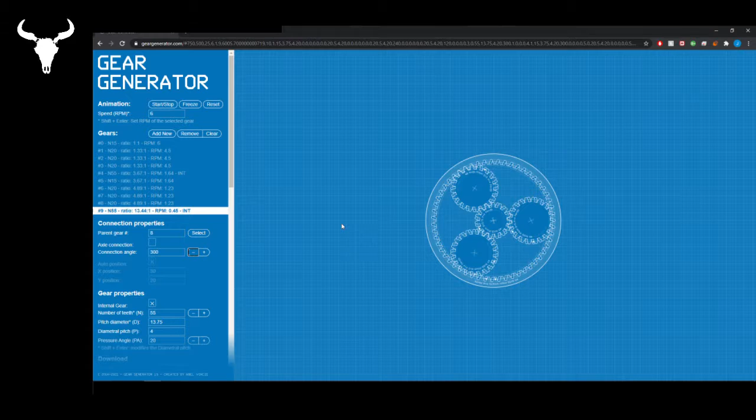That's about what I want on 2 layers. So let's say each layer can be about 10 millimeters thick. We have a 20 millimeter thick for a 14:1 ratio. Love it. Now we're gonna start from that gear, and we're gonna recreate it.

Can I split my screen? Right here, right here. Oh, that'll work, cool. Gotta move that away. Just give me a minute, just want to make sure.

Okay, gotta start from here. Extension, gear tool. I'm gonna post the link for that extension in the video. It's called Gear Tree. It's also on my page on Reddit. The link should be still there. I'm gonna start with involute gear.

First gear, 15 teeth. Now what I love to do, right here, calculator. What works good for 3D printed stuff? It is 40, but I'm working like, I don't know if you can see that thing here. I'm working at 100 times scaled up.

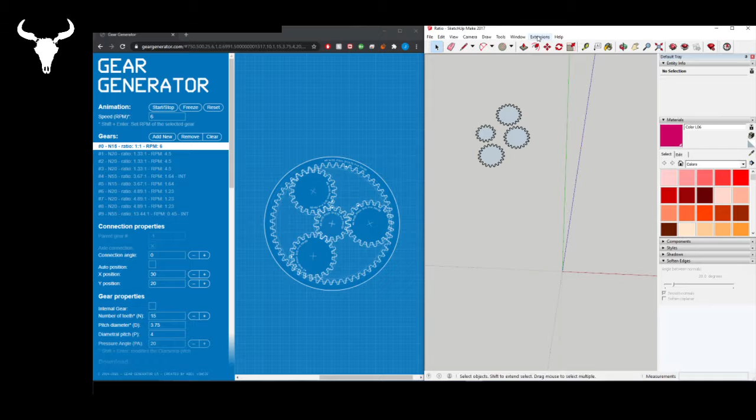Now we need the big one. Big one is 55. Gear tools, involute gear. 55. Calculator. 40. 2200. 2200 right here.

She will work. She don't look like it right now, but she will be functional. Okay, now that is the thing. You calculate this one, so you have

Okay, we had 15. Well, I'll do it in calculator. Shit, closed up my calculator. Calculator right here. So first we had 15 times 40, 600. Had that up to 800. The second gear, we have 1400. Do a circle, 1400. Divide by 2, because it's half of it. Like, whatever. It's how it works. Half of it. So 1400 divided by 2, 700. Maybe not. Don't divide by 2. My bad.

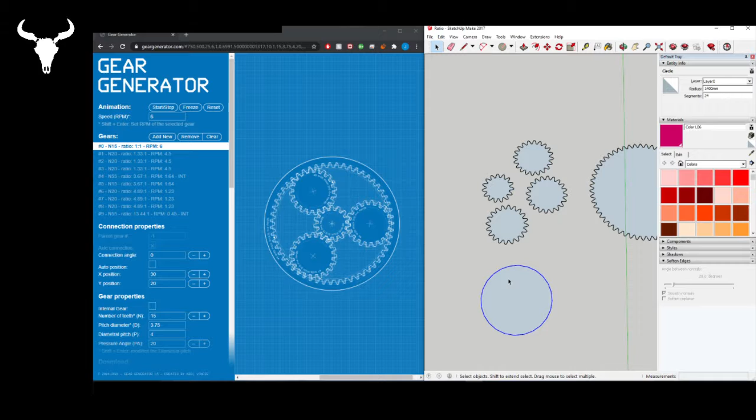Circle back 1400. Okay, we're just gonna make it round. No, not right now. Bad idea. Don't segment. Leave them like that. Actually, even better. Can I do that? 3. Huh. Awesome. It works even better. We're gonna move that. No, we're gonna move that here. We don't have a center.

Just give me a second. Okay, sorry about that. Good, so we go back to it. You gotta find the center of that triangle.

Yeah, looks great. I'm gonna move the stepper gear right in the middle. Yeah, looks about right. Let's move that gear right here. That gear right here. That gear right here. Looks pretty good. Yes. We can close that right now. We won't need it anymore. There you go. So that looked pretty good. They are all at the perfect location.

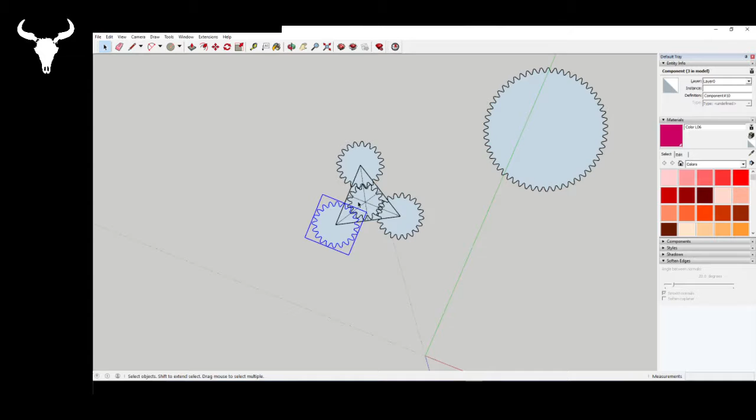Now we're gonna take that gear, move it in the middle, right here. Now the teeth match, but they match the wrong side. So you're gonna make component. Almost forgot about that. Hit that component. Start from the right middle. So we see right here.

If you can see. Right here, I'm gonna have the complete size. Gonna see if you see my mouse. So in here, I have 2300. So we're talking 23 millimeter. I want to add 3 millimeter of side wall to it. So we're gonna go 2600.

And I want it round. I don't want it like all rough like that. So we can click on the outside. Segment 96, usually do for 3D printing. You don't really need to do higher than that. And I'm gonna select the middle, remove it. Ta-da!

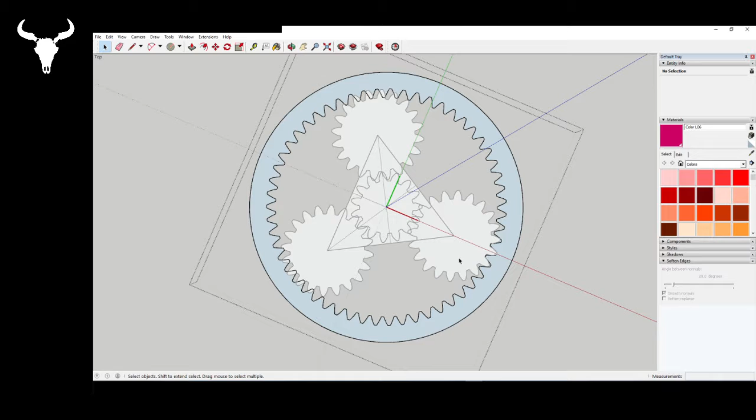Awesome. So I will remove my little, I need to get out there. I'm gonna remove my little triangle. Nope, nope, that one. That one we need. Triangle, triangle, triangle, triangle, triangle.

Okay. Another super tool, it is called Solid Inspector. You can just like look for it. You're gonna find it right away. We're gonna fix stray edge. You're gonna see me doing that like 1,000 times. I just do it every 5 minutes or so.

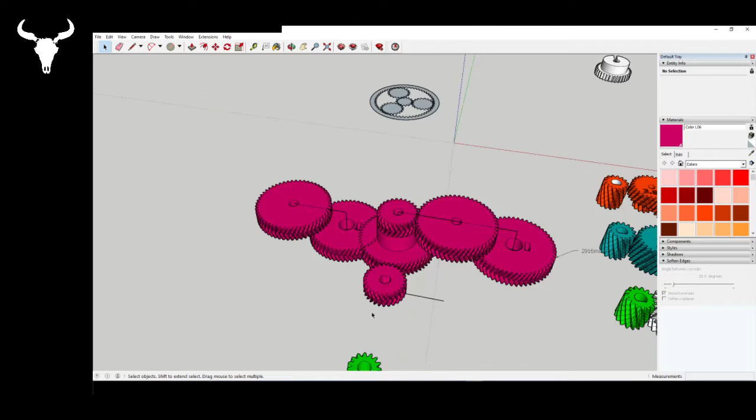That looks like a planetary gear. Awesome. So now we're gonna go from that to well, something like that. They look pretty good. I think those are the last one I printed actually. Yeah, let's go with that.

So it is one gear at a time. So let's select that one. We're gonna lift it. I want 10 millimeter height. 10 mil? Yeah, 10 mil should be good enough.

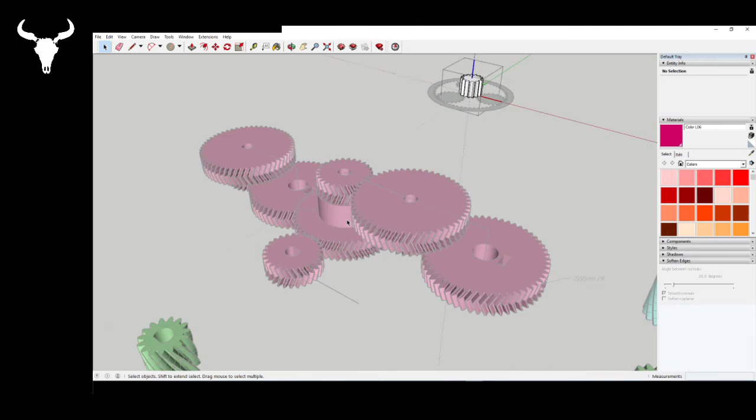The thing is if I go again, do it just to show, so I go 10 mil, that is not good for the 3D printing. I don't like those. It does not work great. It's shaking. I don't like those. I prefer those one with an angle, or even just like single like that.

But now I'm gonna show you why. As you can see, there is 1, 2, 3, 4, 5, 6 layers on that one, and it is almost straight. Looks pretty good.

On this one, if I do it just for fun, so we take top, rotate, corner, we take corner right here, and I go whatever I would need, about 20 degrees. So it looked good, but if you see on the side, yeah, you can see here, it is not straight.

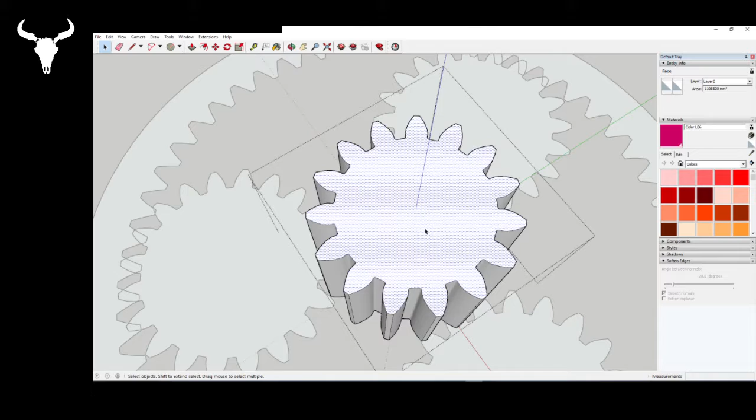It have a curve. It dig in the middle. It's how it is. So now we go back. We're gonna lower that and we're gonna do section. So I'm gonna do 3 sections of 250, so 2.5 mil.

And I'm gonna rotate each section, sorry my French, by 5 degrees. So if you look in the corner, I use my keyboard a lot, so you have to keep an eye on the bottom right corner, like right here.

That does not seem right, is it? Yeah, it is. It's fine. Okay, 5 degree angle. We go up by another 250. Same thing here. Select, rotate right here. 5 degree. Yeah, we're good.

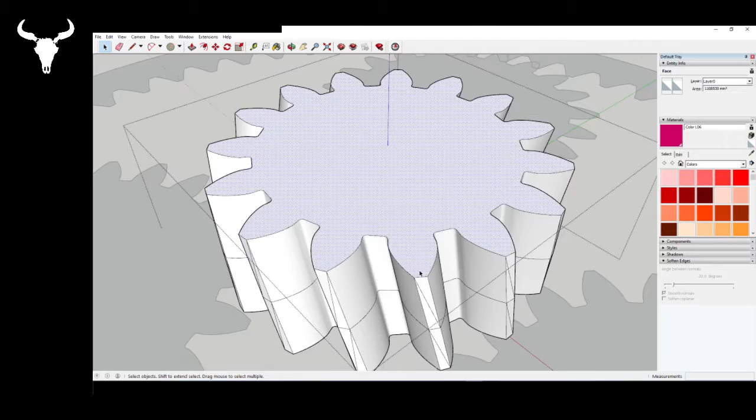Now we're gonna do herringbone. Herringbone. Well, that little shape. There's a name for it somewhere. Herringbone something. Right here. So that little V shape.

So super easy. Go here, lift right here. Lift 250. Select. Turn. 5 degree, other direction. Yeah, you see where I'm going? Can't be easier than that.

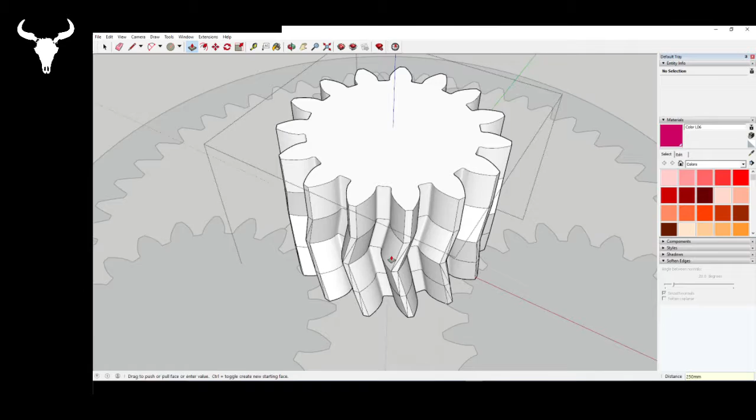I love that shape because it kind of keeps gears aligned together, so they don't move up and down, or so you don't have to bother much about up and down clearance. You don't have to care about it. It worked great. It also eliminates most of the vibration because, well, because it is not perfect.

Sometimes those corners gonna hit before, then gonna transfer to those corners, because the shape, it is not perfect, and you will see the angle isn't perfect either. I would love to find the perfect math to find the angles, but really it worked for me, so I really don't care that much.

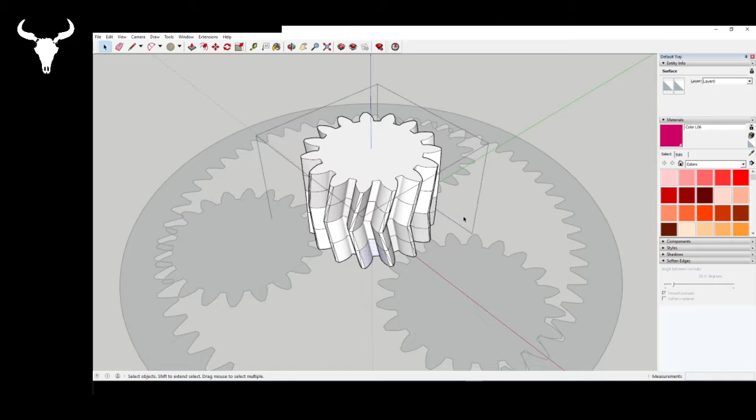I do my angles approximate, they work great, and they actually cancel the vibration. And also the feedback. When it turns on one direction, then it turns on the other direction. It's like on actual gears. If you buy those gears, you're gonna have a little slack, and it's gonna steal like 1,000th of a millimeter or something. I don't have that.

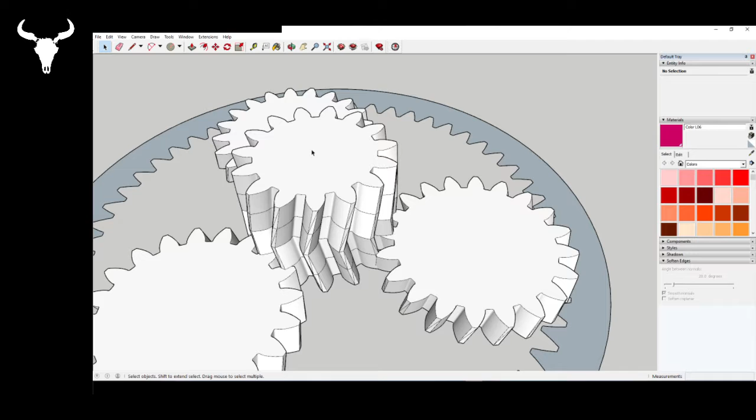This is, I would love someone to explain it to me why it does not work, because it should be working. Like, you take that platform, you start from 0, you do 5 degrees. Take this one, 5 degrees should be the same. Like 360 degrees would be coming back to the same teeth. I don't know why it does not work.

So we're gonna erase that. There's one way to do it. Took me a while to figure it. So I'm gonna go here. I'm gonna go to the gear I did first.

Corner of the first section, or whatever section you want. I'm gonna go down. On your keyboard, if you're not used to SketchUp, you have those arrow keys. Use the arrow key, so it's gonna keep you going in a straight line. It is awesome. So right here, I'm gonna say it is awesome like 1,000 times, because I'm not drinking coffee and I'm French, so yeah, deal with it.

Now I go right here, corner right here. You see in the corner here, it tells me I'm at 250 millimeters. That's correct. So I click once, and I don't click, I just push it right here. Don't click, so leave your pen right here. Right here, I have 59, and if you can't do it, right?

No, I can do it. When I do my 59, there's a little line average. This is why I use my keyboard. So we have 59. You will see why in a second. So I click on this one.

Plate, rotate. I select the gear. Wait, my bad, skip the step. Okay, so I'm gonna go here.

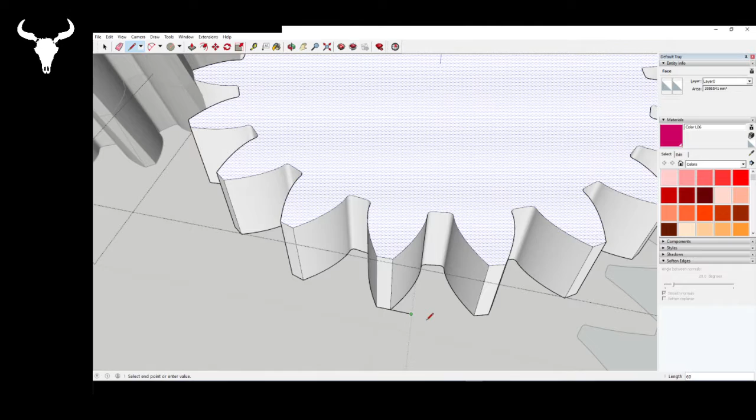This is the imperfection that's gonna make it perfect. So I'm gonna go up to 60, and now I have a little guide right here.

I'm gonna take that corner right here, well, the opposite corner of that line, and I'm gonna bring it. I'm gonna click, you can put your cursor right on top of it. It's gonna be the closest point to that point.

We have a 3.9 degree angle. So you see, it is not 5. I have no clue why, but I don't care, because it works. I'm not a mathematician, I'm not an engineer, I just do this for fun. 3.9 worked for me. The thing is, you see the little line?

Like, I'm looking right here right now. So just look right here, where my little mouse is moving. So I'm at 3.9, you see the little average line, closer to 3.9 or whatever. You don't want to use your mouse for that, because you won't be able to see the rest of the number. It can be like 3.94, 3.96, you don't see it, you don't know it. You don't want to click with your mouse.

You want to click on your numpad and let's do 4. Enter. Boom, there we go. So now we know that our angle for this one is 4 degrees.

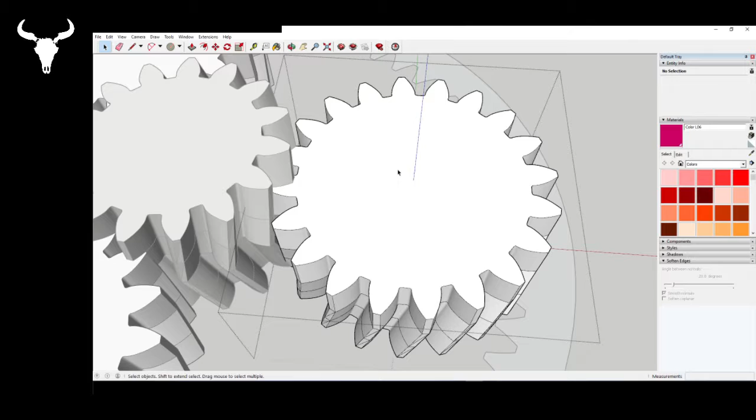250, and we're gonna go with 4 degrees again. Right here, 4 degrees. Then we're gonna go the opposite side, 250. 4 degrees. And last one, 250.

4 degree. And because you always lift from the top of the last layer, it's always the same degrees, because it just adds up. You're already adding up, so it's always the same angle.

So that looked pretty good. Oh yeah, and they're all aligned. That is awesome, so you see, boom. So we have 3 gears, functional gears.

So we're gonna do that. Oh, here. Export STL, you might not have that option. It is an extension called STL, I don't know, it is an STL extension for SketchUp. It's free, it worked a million dollars. It is awesome.

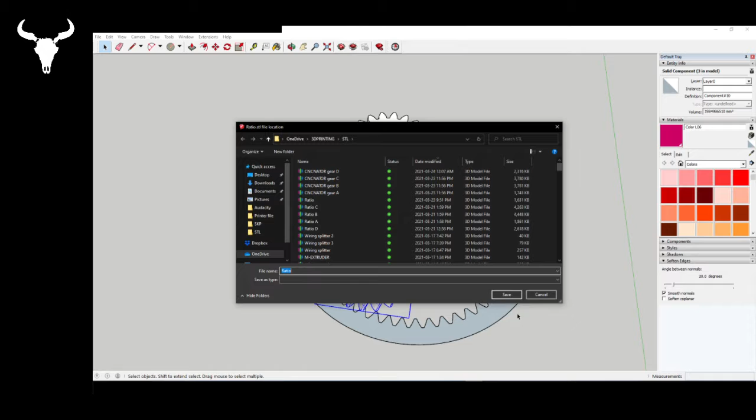Okay, we got save as ratio, it's good for that. Ow, that was loud in my hair. Wow, I should really reduce. Oh, that, ow, that was so loud.

If I go from one point to the other, look in the corner, bottom right corner, it is like a meter, 1.4 meter. It is reduced by 100. So that way I can work on it here. It's much easier to work, to see the error, do much better, a much better definition. You can fix smaller stuff and everything.

SketchUp is not... SketchUp is a starter one. Like I use it because I'm good with it. If you're learning a CAD program, learn something else, please. This is really just amateur, whatever. It is great stuff, but just like my kid plays with it. It is awesome. Okay, so back to it.

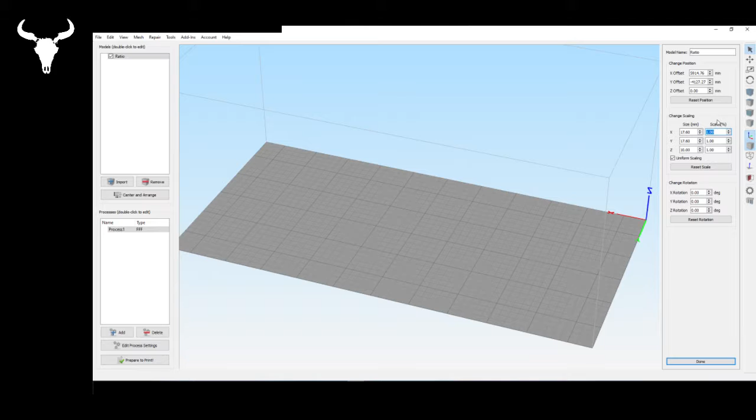So I said times 100, so I go here, double click on that scale right here. Take a second, 1, done. Center and Arrange, there you go. I have my gear right size.

So I use 100 just for that reason, and every time I load a part in there, like any part I did, those I can show. There you go, it's always telling me that. There you go.

1% center, you see? It'll work. Awesome. It's just a way to do things, it's how I work with SketchUp.

Now, so I have my gear. She looks pretty. Is she printable? Prepare to print with your regular settings. She is.

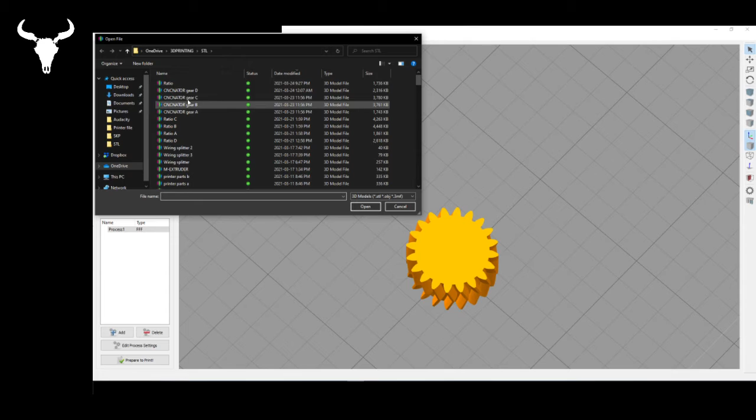She's not bad because you can see fillers in here. It is the minimum. Let's go back a bit. Are those the same? Yeah, I know. I just want to make sure I haven't screwed something up.

Center, come on. There we go. Print. That is interesting.

I look like I have more than... Why do I look like I have more gear?

Wait a second, export STL. Ratio, that one, 927. Yeah, it's good.

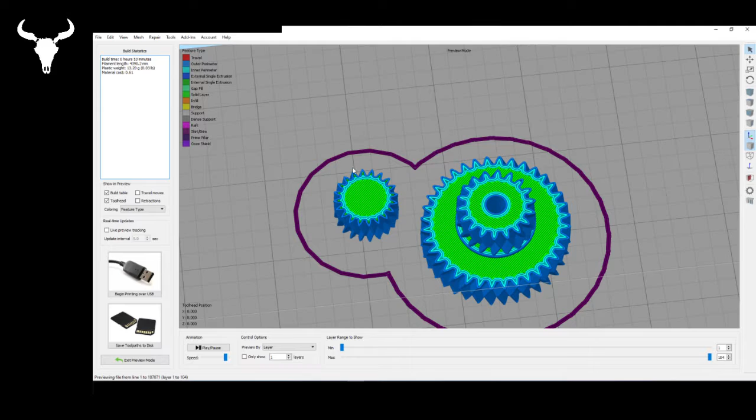Why do I look like I have more? 2, 3, 4, 5, 6, 7, 8, 9, 10. I have the 20 teeth on that thing. What is wrong with that?

Let's remove everything. Ratio, 9:30. Yeah, I know.

Huh, that looked much better. Okay, no, sorry for that little thing. I don't know what happened with that. Prepare to print, no, it is the same.

1, 2, 3, 4, 5, 6, 7, 8, 9, 10, 11, 12, 13, 14, 15.

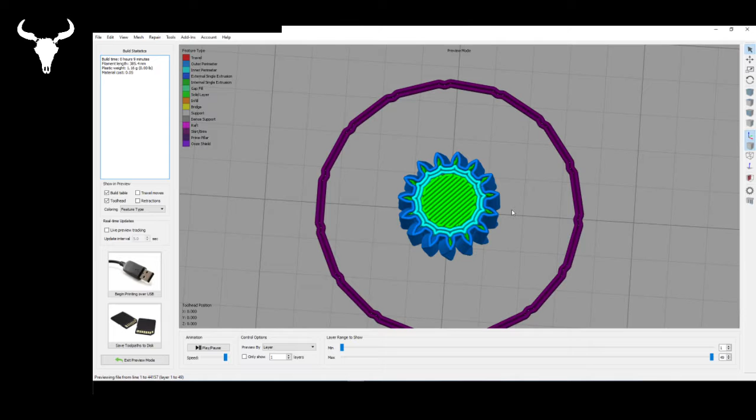Let's go with that, it's small. I love to do about 20 teeth, but it is small. It's really limit, this one's really limit, where you see some places where you don't have fillers.

See it, but I'm using my setup right now. This is a rough machine, it's 0.4. Yeah, I guess it's gonna do for everyone.

It is the minimum, you want at least filler in there. If you don't have fillers, make the teeth bigger. You want at least filler. If you can have 2 layers outside, it's even better.

At least I know that one print because I do it all the time, and she worked great. Those are actually gears running my printer, so I know they work. So right here.

So we know the print now. We have this one here, we have to do 2. That is going to be a first, that is going to be interesting. So from that thing, you're going to hide the rest because I don't want to see.

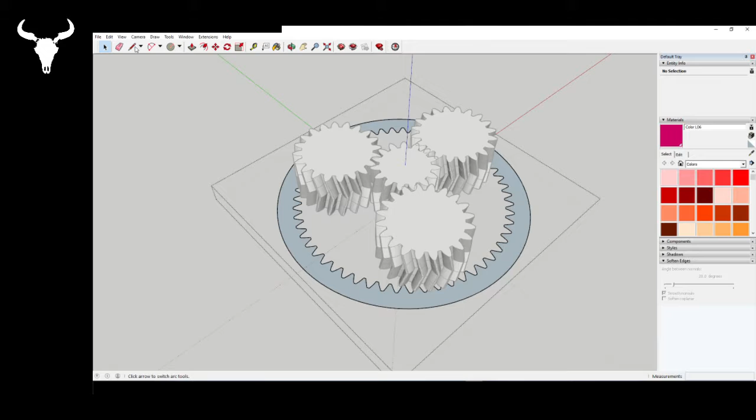Shit, I forgot how much I had. Oh wait, I have to do my measurement again. So I go here, down to that one, 250, and 59. So 60, okay, we were at 60.

This is gonna be a first. Sorry about that, hide rest of model. I don't want to see the rest of it. We gotta lift that, 250.

Now we want to rotate from the middle. That is gonna be interesting. No, actually, you know what I'm gonna do? I'm gonna start the line.

Since you can get the origin right here with that tool, with that gear tool, it is actually always a perfect middle of the gear. So we'll start from origin, top key, we want to do 10 mil, right? So 1000 right here. Now we have a line, so we click on that thing, rotate from here.

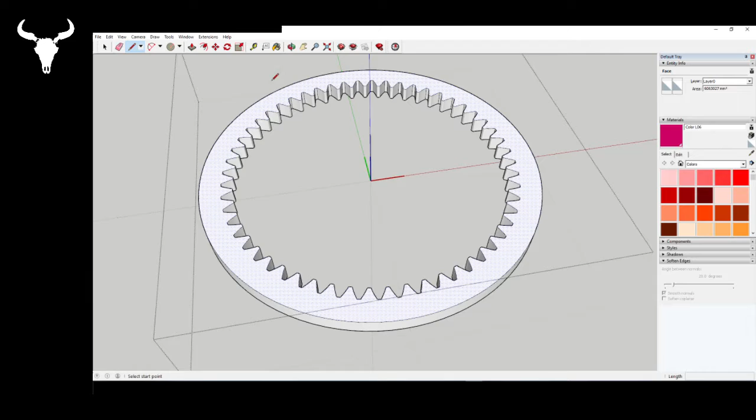We need to do those. We're gonna start from here, corner, 60, and right here. So we're gonna rotate from...

Gonna go with, if you want to see, they're all rounded up. It's right here, it's smooth. If you want to see those, view, hidden geometry. There you go, awesome. So I want that line right here.

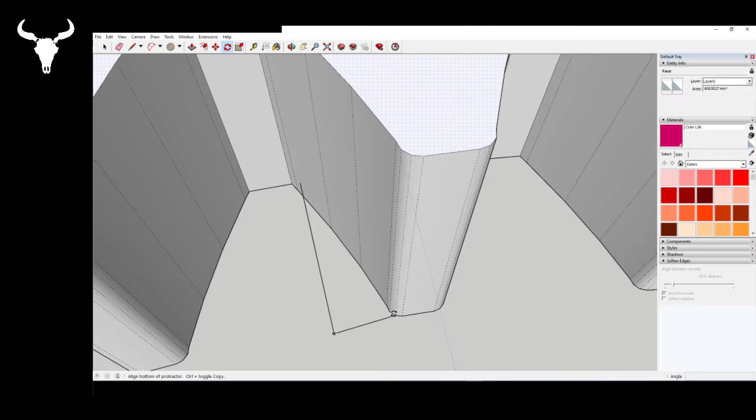Here, I'm gonna rotate it here. 1.6. Yeah, I guess let's do 1.6. But again, right, it won't click. If you click, it won't work because it won't be the same in between each layers. So you don't click, you do it 1.6. Enter. Boom, there we go.

Okay, let's take a quick look. Am I in the right direction here? I'm not sure. This is going to be a first, so that's going to be, well, you see...

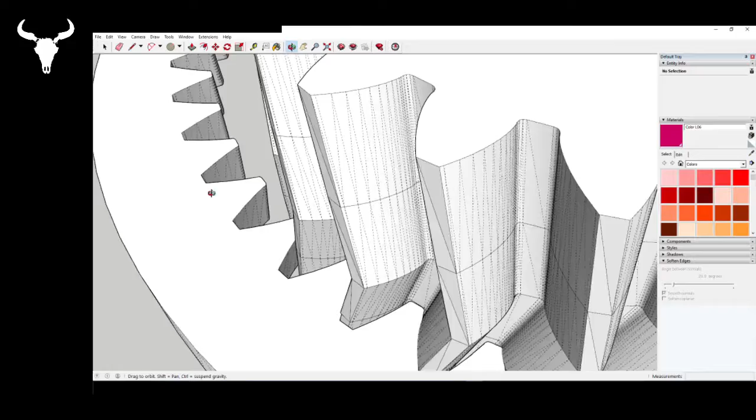View, face style, X-ray. You see that gear here, she's in contact right here. She's not in contact here. And we turned that way, so let's do 1.5.

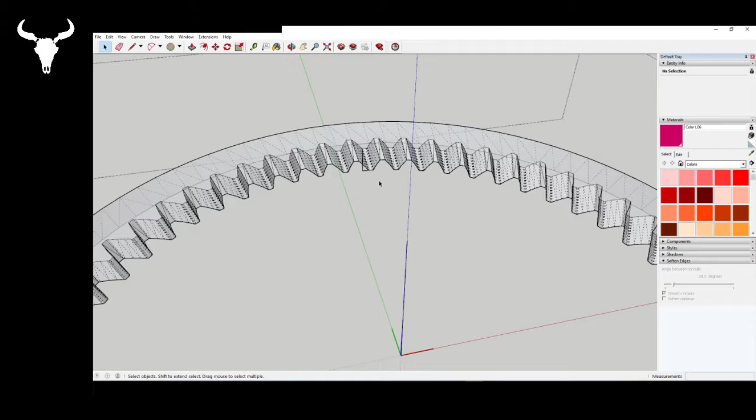Where am I now? Oh, right here. Let's do 1.5. I wish I had a perfect number or something, but I don't have any. I try until it works - that's basically how I learned to do it.

Whoops, I have to click on that section first. If not, you're just going to rotate the center. You can click on any point, really, it doesn't matter. 1.5 - no, not 6, 5.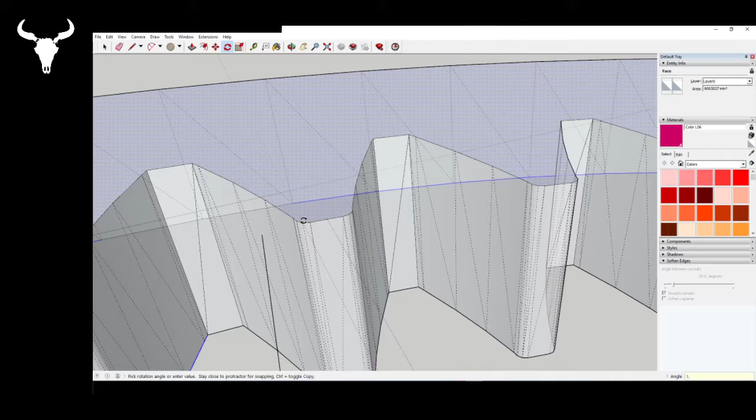We look almost farther, let's look at that. Come on, there we go. I hate that thing - no, not that one. Not that one. Huh, looking better though, right here. That looked pretty good.

So you can see, if I take that line here, I'm in contact right here, and I am in contact right here. So you see, you can adjust. It's why when you see the 1.6 with that little line, it is not fixed.

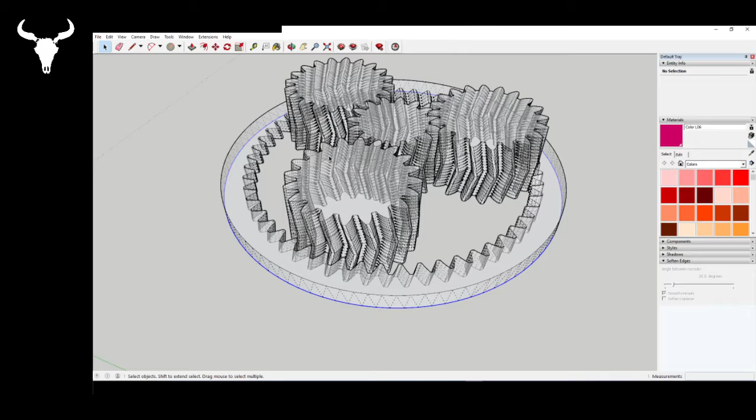Do it with your keyboard. You can add and remove, just usually I go up. It'll always work. But you see, with the size of that gear for X region, I removed 1.5 instead of 1.6, whatever, and it does look pretty good.

Oh yeah, cool. Now we're going to put her face back to - there we go. Everything's white. Everything's so white, I hate white.

Let's do - that looked better, oh yeah, that looked much better. We'll change those right here, a little bit lighter, and this one darker. Awesome, looks much better.

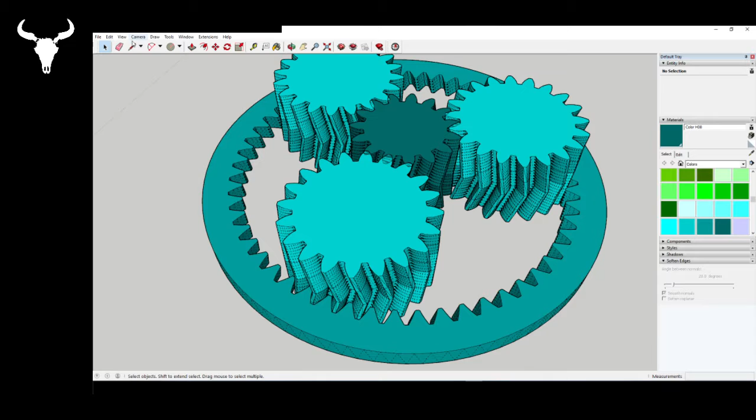Okay sorry, also I don't want to see those lines. You might need those, I don't like those. There you go. Okay, so first layer will work. We have 1.5, so we can do this.

Same thing again, lift. Oops, 250. No, it's always the same, it's a bit more complicated. So here we have 250. We want to go up by 250, so you can see bottom right again using my keyboard. 250, enter.

From there, if your tool, when you rotate, is not the right color - right now we're working on a blue line, we want to be working on a blue line. If you hit your arrow key on the keyboard, you have green, pink. Pink is related, you can see there's another pink line. It's just going to take the closest line and go the same direction. Red is X, I guess. So green is Y, and blue is Z. Those are the arrows on your keyboard - use those, they changed my life.

And you see, I just made a mistake. You have to click right here first. Why is everything selected right here? I just want to turn that, I don't want to turn anything else.

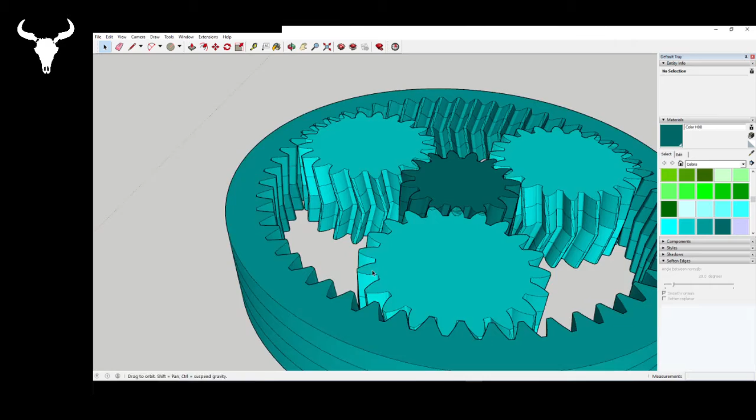That looked pretty good. And you see, after all those levels - oh yeah, looks pretty good. So that would be it - well, now you just take your gears, put the shaft in the middle, and you have your planetary gear. That is sweet.

That was easy. Now for this extra part, I should have something so I can cut the videos, but whatever, I'll figure it out later through like 3 videos or something. That is the extra part I want to do now.

Because when we went here, you see I had 2 gears on top of each other, because I want to achieve 14:1 - that is a great number, love it. So we're going to start the second layer. Most of it's going to be copy and paste because they're already built - we're all using the same gear ratio.

The thing is, we have to connect the outside layer, the outside ring, with the middle gear. Let's do that.

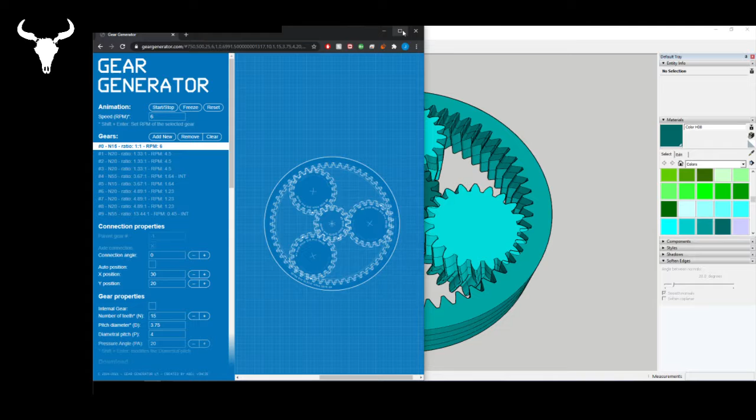I'm gonna take that one here. Actually, you know what? I'm gonna take all of that, copy, paste. I'm gonna keep that. Come on. Oh, there you go. And make unique right here, so you don't modify it anymore. Just for later, I'm probably gonna need it. This one here.

I'm gonna give about 0.5 mil, so we're gonna go with 0.5, so 50. Okay, we're gonna fill up the top section. Now we have 0.5 of space, just so it's not right by the top of it. That is not the center, we don't want to get messed up.

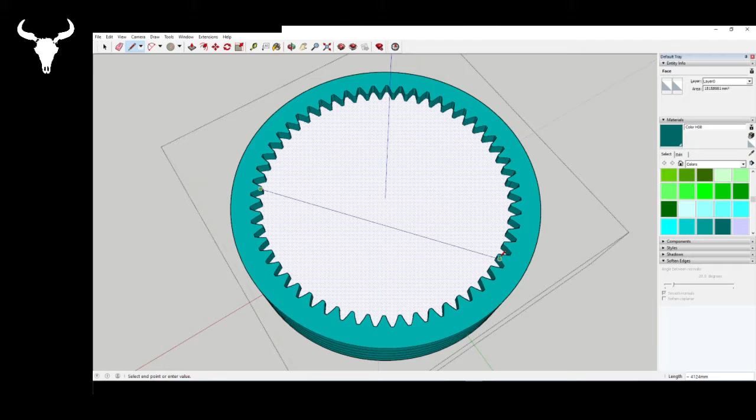Okay, now we're gonna give him, it's about 2 mil. I love some thickness in what I do. Okay, we won't, don't lift this one. If you lift it, it won't work. Well, it might work, it might not. Just do another line right here.

Okay, now we're gonna click here just to make sure that you don't actually lose those steps. Intersect face with context. There we go, that was good. Also reverse that face, she's upside down. Right here, we're gonna select that here, delete it, and we have a top.

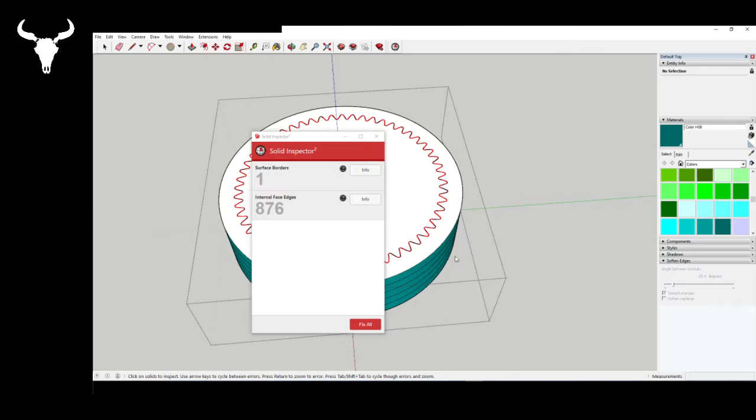Now you can see those lines here. We can delete them right here. Solid inspector, we have surface borders, internal edges. Can I do that? Select internal edges, close that. Not sure. No, we can't do that. Okay, don't do that. Okay, come on. There you go. Okay, so we're gonna delete that one.

Does it really matter? You know what? I don't think it actually matters. But if you delete that one here, oh nice, now you see your gear. And I delete all of those here. That's gonna take a while. Does it work? Oh yeah, look good. Okay.

Come on, a little bit of lag. I'm using an old version of SketchUp too, so if you're using anything newer than like 2017, you might not lag as much as I do. It worked great for me, and I'm broke, so I don't want to pay for like 2021 or whatever.

So clear that out. Fix edges. Those here should be fixed after. So let's just close that circle right here. Come on, next point. There we go. That looked good. Should be able to fix. It doesn't want to. Select internal face edges.

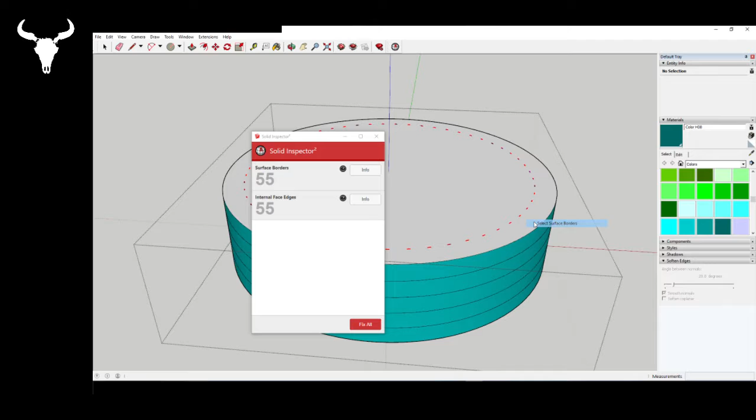Delete. No, don't do that. There's one of them. Surface border. Surface border. That looked good. There you go. It worked. Awesome. Just to make sure, is this one right? Yeah. Okay, there you go. Look awesome.

Okay, now we're gonna take our shaft gear. We're gonna copy it, paste it right here. No, actually delete. Double click on that.

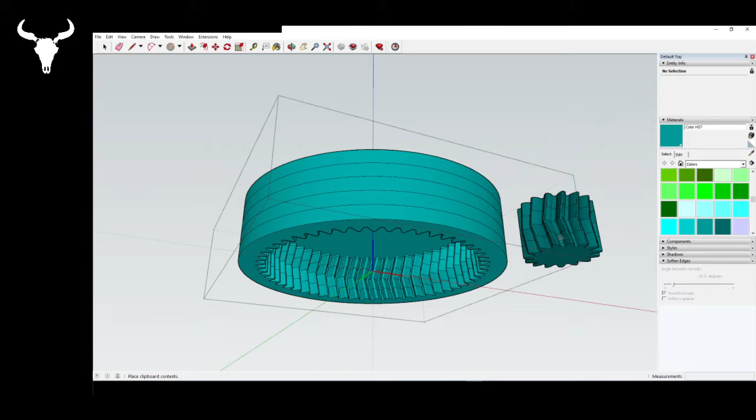So now we're editing this one now because we're gonna add it to that component right here. And here we have origin, and we're gonna put the origin right here. That was first click. Then we click on it. Top arrow.

I'm gonna go up because you see now it's attached to my Z level. I want it on top, so you can see. No, that doesn't work. Is it? Yeah, right here. Boom, and explode. Do do do do. Awesome. Boom. So now we have our one gear.

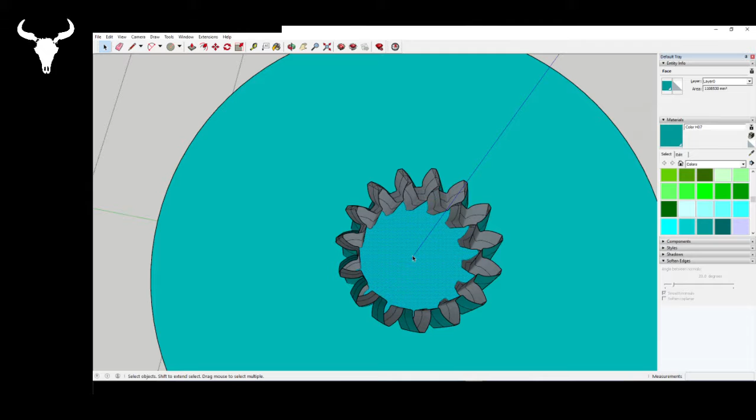Select all. There you go. Now we're gonna delete. You just want to delete that part here so you can see the whole thing. Well, it's white because it's the inside part, but at least there you go. Okay, let's make it pretty again.

Now that's our first layer. This is our second layer. You can actually just copy those. Copy. Let's paste those. Come on. I want them right. Same location, so seriously, it's useless.

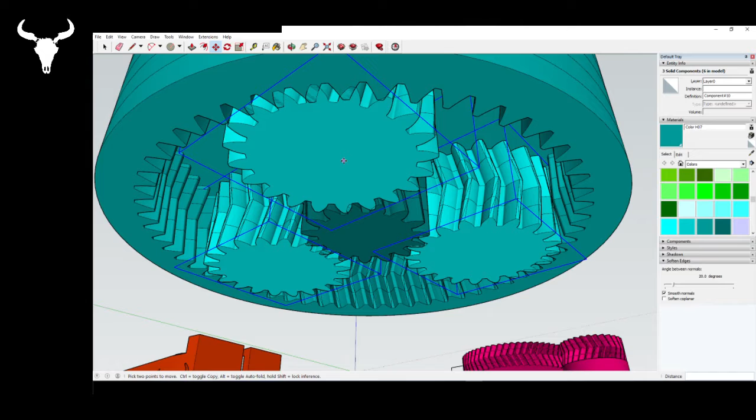It's just because I want it to look pretty. Up, right here. Now we're gonna give him. No, we don't need to. We'll give him on top. Okay, so right on top there. We have that.

Now, that is why I copied the clear part. Select that one, copy, paste. Let's go right here, gonna make it unique, just to make sure. Select everything, give her a different blue. Is she different? Yes. Now, awesome.

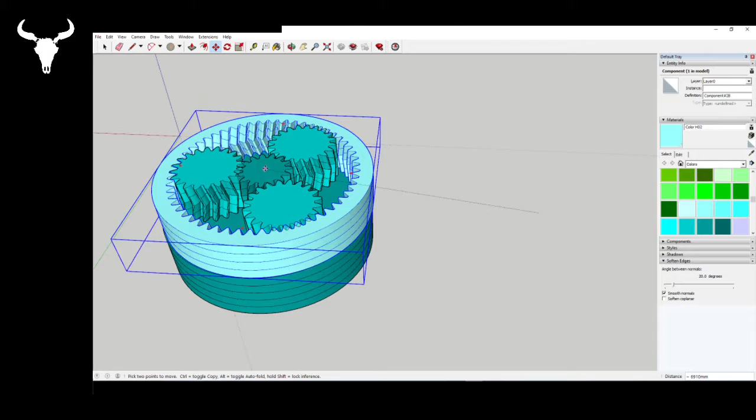Drink again. I said awesome. Right here, she don't want to. Come on. Okay, to fix that, I'm gonna go in that little gear here.

I'm just gonna make. She don't want to. Gonna make a line from origin to top arrow. There we go. Can't see it, but there's a point here. We're gonna move it up, right on top here. Sorry about that.

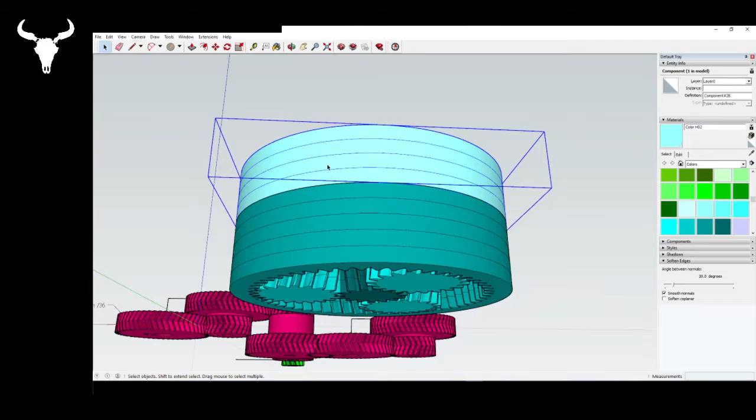Now, you see those two sections here, they are in contact. We don't want that. So what I'm gonna do, I'm gonna reduce that up here by 25, so 1/4 of a millimeter, and I'm gonna do the same on top. So basic, yeah, that'll work. Okay, so you see now there's a little clearance, just so they're not right on top of each other.

Your printing's not perfect, so you might need that. From that, we needed, well, now it worked. Now we have our 14:1. We have it now. Do I want a gear in the middle or do I want a gear outside?

Actually, you know what? I don't want a shaft in the middle. Right now that gear is going to be a 14:1 ratio with the stepper motor.

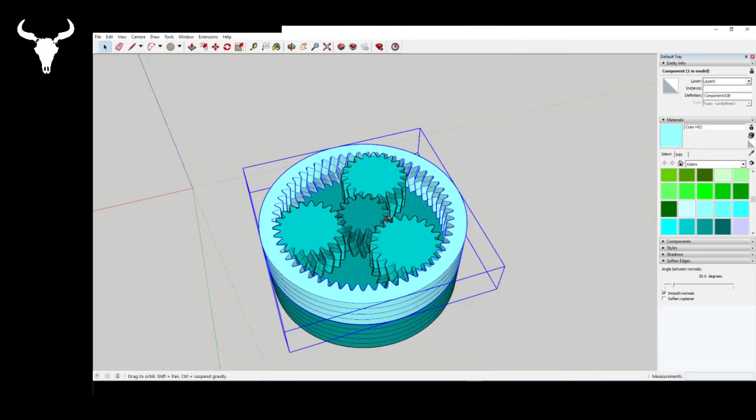Let's do an outside gear instead. How am I going to do that? I want the teeth going here. That's going to be interesting. So I take that one, going from the middle.

So now I have 25, lower right, 25.99 millimeter. That's pretty precise, I'm going to go with that. Wait, does it work? 25.99, no, I need my calculator. Okay, 2599 won't work, that's for sure. So do 2600, divide by 40, because remember each is 2 times 40.

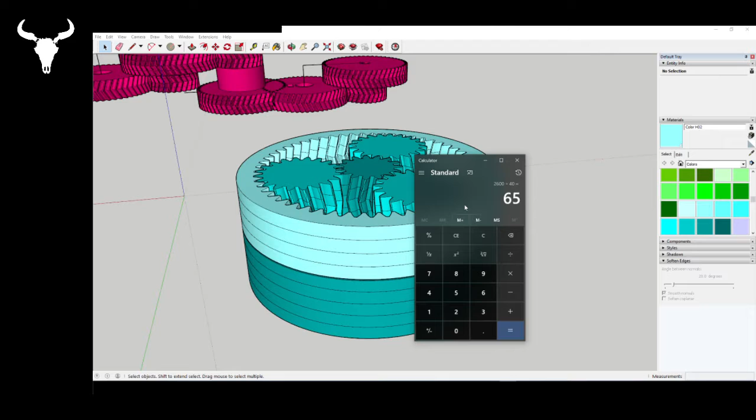Now we go the opposite way, the diameter, divide by 40, 65. It'll work, yeah that's sweet. You might have to go 1 up, 1 down, 2 up, 2 down, you have to find the number that works. I just happened to find it. That is awesome, drink again.

So from this one, okay now I've got to make my gear outside. I don't want to mess this one up. Extension, gear tool, involute gear. So we said 65 and 2600.

There's a big gear, copy that gear. We're gonna go in here, we're gonna paste. If we don't want to mix, we're gonna make component, create. So now it has its own center. We're gonna move from origin to his own origin. Sorry about that, I'm gonna stick it to it.

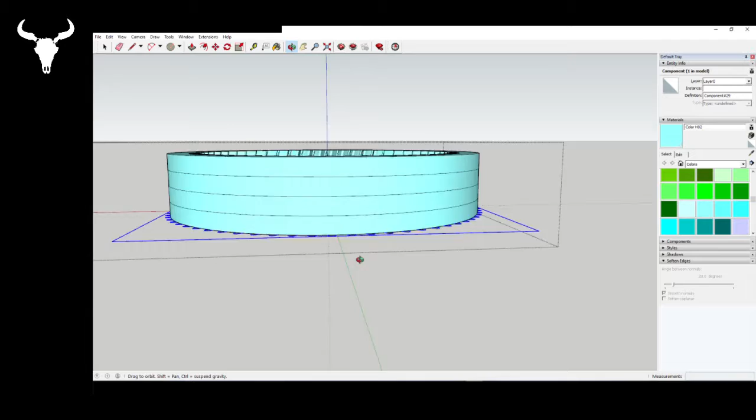I don't like that because it goes way over. By how much? It goes over by 80 millimeters, so about 1 millimeter. It's nothing really, but we're gonna try to remove it. So 80, let's remove, let's delete that one, delete that one. Tool and little gear, so I had that. 80 mil, so 160 because there's 2 sides.

So let's do 2440, and we're gonna divide 2440 by 40. I always close my calculator. 2440 divided by 40 is 61. So we have 61 teeth now. Okay.

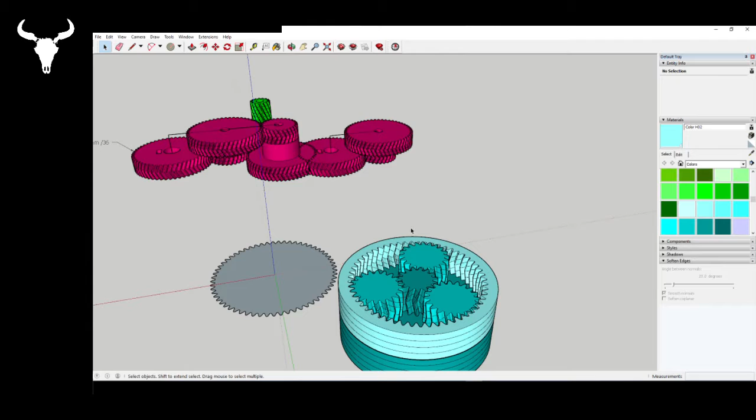Same thing again, paste it here, create a component, origin to origin. She's short now. Okay, let's go 80 then. You see, learning curve, this is the first time I do that. It is awesome, I can't wait to print that actually.

Gear tool, involute, what happened? I did the wrong one. Gear tool, involute gear, there we go, I was afraid for a second. So we're gonna go 25, 20, so we're only gonna remove 80, not 160. And you remove, I need to add 2. 63 will work, there we go.

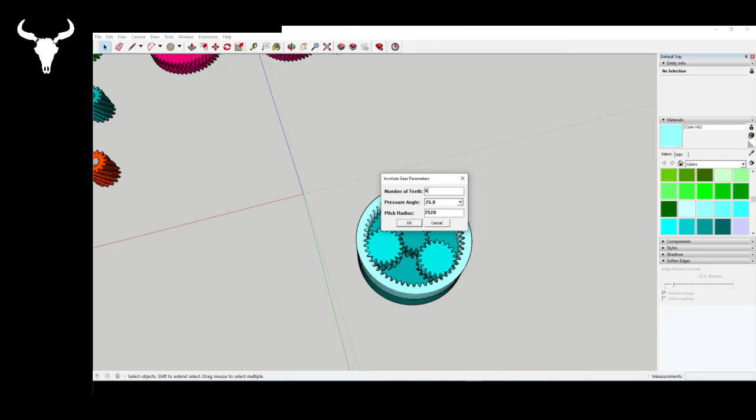Okay, copy that one, paste it, move origin to origin. Ta-da! Does it look good? It looks awesome. Drink again. Okay.

I wish I had some viewers, come on, you guys would have fun. But I really don't care, that's just a video that's gonna go on my YouTube channel, so I couldn't care less. I'm not doing this to be popular either, I'm just trying to show people how to make gears because it is fun.

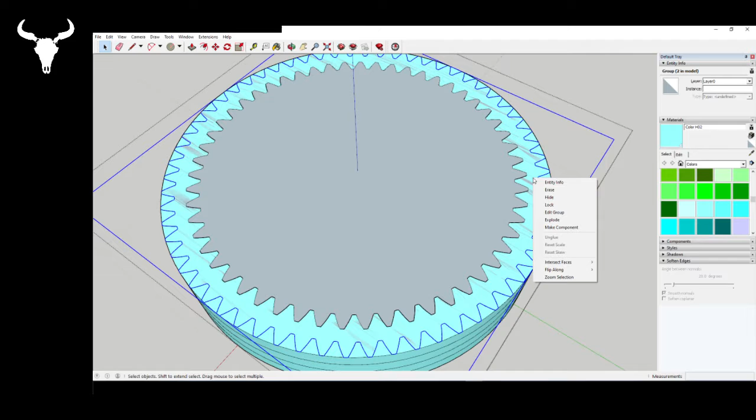Explode. What happened here? Okay, it'll work. Now actually it's good that happened because I forgot something. So we're gonna go Z, and right before moving that gear, I'm gonna lift that one by 25 - not 250, 25, just a quarter mil, just some clearance. Remember the first gear I did 0.50? Well this one I did 25 bottom, 25 top.

So, where's my 25 on the bottom? Why don't I have my 25 on the bottom? Oh no, it's the bottom that's empty, it's just clearance. It's good, yeah, the bottom's here. Okay, this one here, I'm gonna move it anywhere. There we go, boom, looking good.

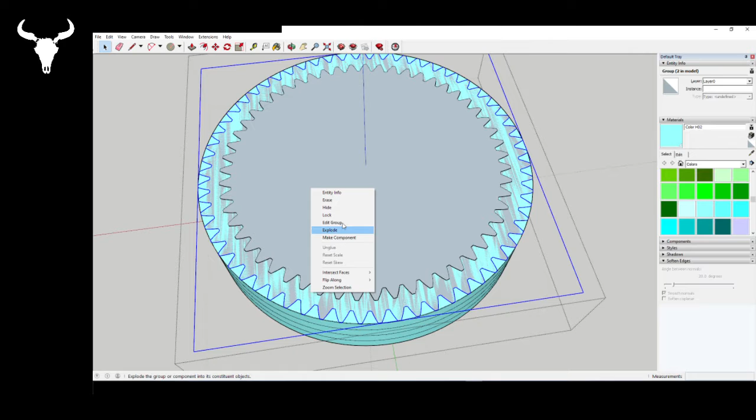Explode. Now we're just gonna fill up that emptiness right here. You can just click from one end of a line to another and fill it up. There we go, and we're gonna go to the same layer again, so 250.

This first one's gonna be a bit different because you have to keep that space as solid. This one's the wrong side, so we won't touch that. We're gonna do - I don't want to erase all those again, I'll try at the end, I'll see what happens if I leave it there. There we go.

Can I just click on that? Delete, let's try something. Those stray edges, you can always fix them, it's never a problem. Now we're gonna go surface border or internal face edges. Internal face edges.

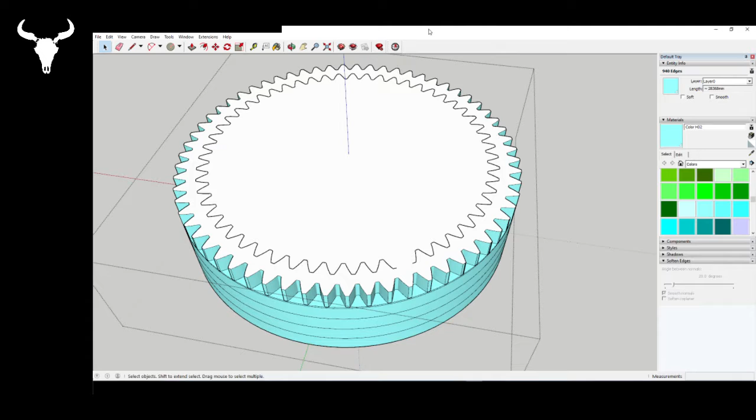Not the right one. Okay, let's try that again. No, it's the same one. Surface border. Ah, now it looks good.

Ta-da! So surface border it is. Oh shit, okay, those. I have some little holes here. This is why I'm working, imagine I'm working at 100% scaled up. Those would be like you wouldn't even see them, and it would just destroy.

Oh, that's kind of weird. It would just destroy your shape. You wouldn't be able to do anything with that. You wouldn't be able to print it if you wouldn't see that. This is why I do everything 100 times bigger.

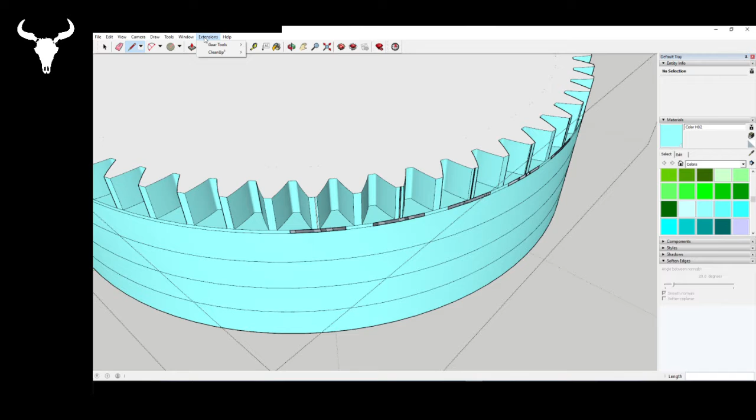Now I'm gonna fix that real quick. Isn't that a straight line? So we're gonna try that here, and right here. Okay, and why doesn't it work here? Come on, 3 line, really? 4 line? Okay.

Let's try to fix that up real quick. So corner, corner, corner. Nope. Corner, corner. Sorry, it's just gonna take a second of filler. Actually, you know what, I'll do that later. Yeah, I'll do that later. You guys don't need to see.

Well, if you want to make it printable, you just need to make sure all your faces are clear. So that's what you're gonna do, you're gonna do all around it. I used the wrong way to cut those center, but anyway, it is what it is.

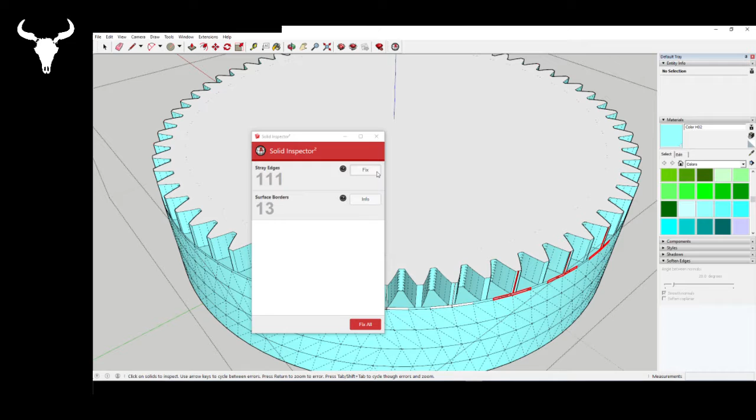You guys don't need to stick around. You can see actually, if you open that, you can see the red line. If you use face style X-rays, you're gonna see a bit better. You can see all the holes. We'll just fix that later, you don't need to see that.

Okay, let's go back to it. So I have my first section. Oh wait, I need to close those first. I can't turn that section if those are not closed, because it's gonna go all wrong, all kinds of wrong.

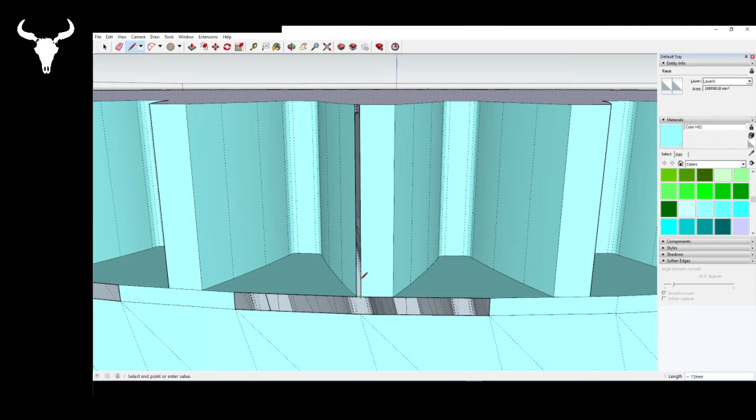Oops, what is happening here? Come on. Really? There's a point here for no reason. Damn it. There we go, looks like it worked.

Next, right here, so I just have at least to close those. If you don't do it... come on. I'm 100% sure any better CAD program has a better way to do it. It is what it is.

It doesn't take long. Another one, here. It'll work, cool. Do I have another one? Right here, close this one. Come on, I know it's the right one. There we go, almost there.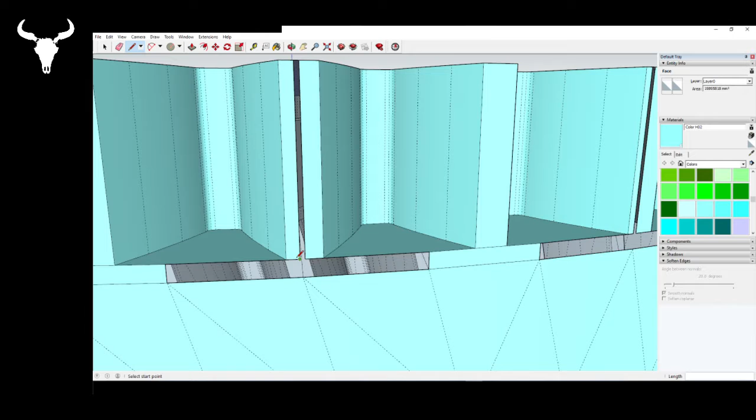Funny, because my Twitch app tells me that I still have one viewer. Unless he's... because I know you need to be registered or something on Twitch, I don't know how it works, but I've viewed some where I couldn't talk.

1.5. Shit, I need my line here. If you need your center, just go back to the bottom, up, straight line. We're gonna do 1275. We don't really care, let's do... no, it's gonna be more than that. Let's do 2200, we'll delete it after.

Yeah, so to actually chat on Twitch, you need to have an account or something, I don't know how it works. I know I can't chat on Twitch, so yeah, I guess. But option A is you just don't bother to register, or option B, it is just... what's happening?

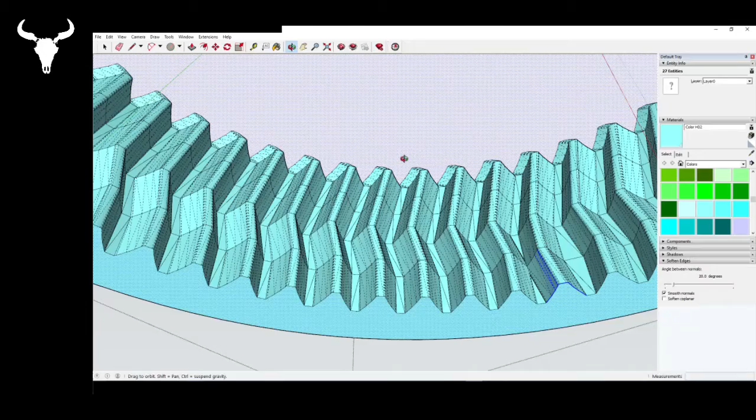Whoa. Huh. Something's wrong here. Wait. Oh, I had both of those selected, this one and the top one. Huh, okay, that was why.

Yeah, so I'm pretty sure the only viewer is actually myself, just doing my own thing. Whatever.

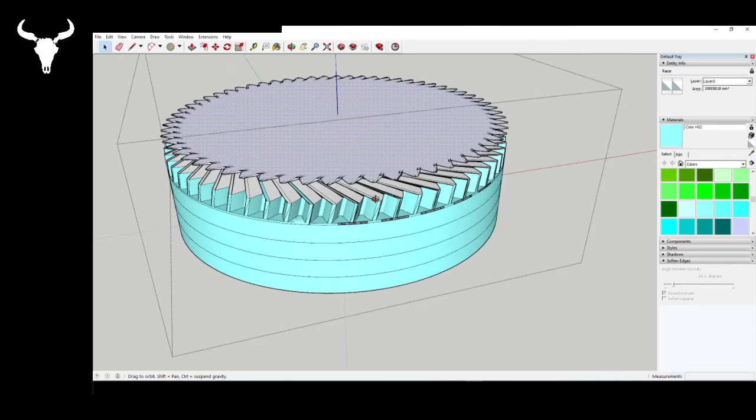Yeah, that'll be good. Okay, 50. Yo. Whoa, I messed up here. Middle, right here, 1.5, okay. 250 again. 1.5. 250. 1.5, there we go.

So everything, we're gonna paint that like that. So yeah, we have our beautiful module.

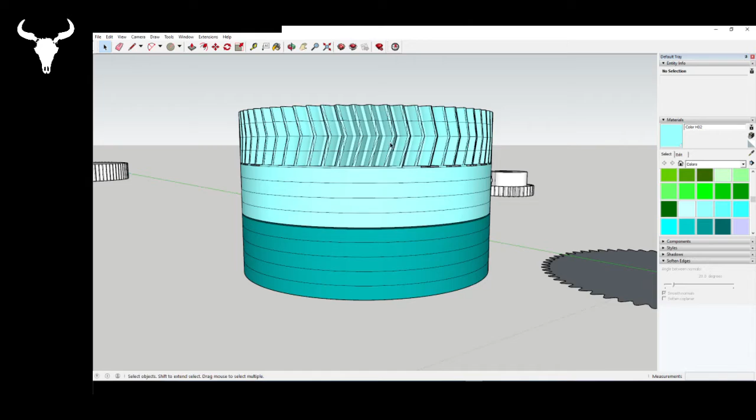Yeah, there we go, 14:1. Not that thick. As you see, from bottom gear to top gear, we have 3 centimeters, so 32 millimeters. It's pretty good. You could have done like I did, a big gear here. I did a big one. Actually, the best way to do it would have been to do a small one.

But it's fine, it's gonna work. Let's actually check if it's gonna work, let's check that one here. I'm gonna reproduce what I did in the other app.

I'm gonna add new, I'm gonna do axle connection. I had 63 gear. There we go, you see it goes right to the right size.

Now from that one, if I want, let's say put the actual gear that comes with the filament, the Bondtech, one of the extruder gears. It is 18 gear, I'm pretty sure.

So that would be like your teeth with the filament. The filament will go down here, or whatever how you want to do it. And I have... that is not what I want.

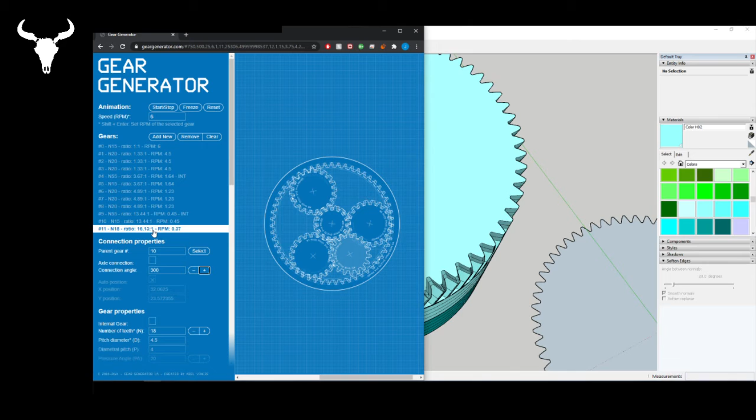This one is connected to it. You can see she's moving right by herself right here, and she is a 16:1. I love it. Yeah, so 16:1 it is.

Well, basically I will just delete that. Come on, one more, one more. Oh, I fixed it, come on. Almost there.

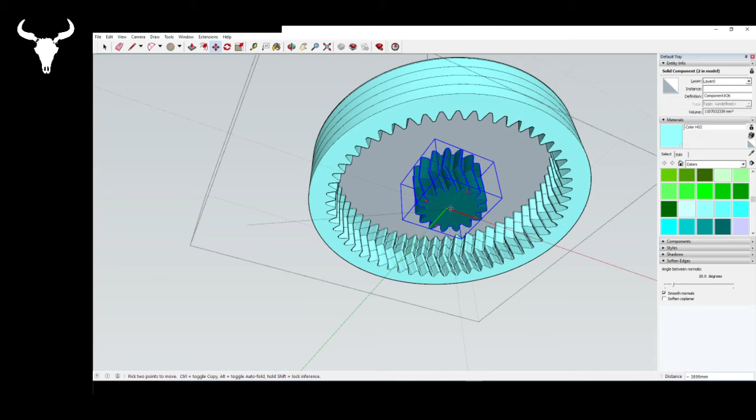There we go. Okay, so from that, what I'm gonna do, I will just steal that gear right here. Going back in there, I'm gonna position it, so from origin to origin, from any point to top surface.

You see now I don't have a distance here, so I need to bring her, move this one up, I'm gonna do 2 mil. I'm gonna delete that. Ah, shit, I should have deleted all that first. Let's do that.

There we go, right here. That we don't need. Okay, now that here. Close.

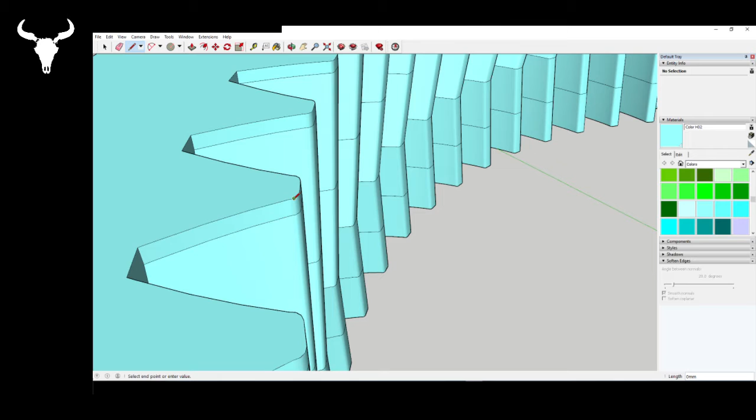Nope, we need to reach 2 points, 2 green points, fill it up. We're gonna go 2 mil up. We close it up again.

Okay, now we're gonna... can I do that? Ah, nice, it'll work. Okay.

Origin to origin, face up, so up arrow to face. And we explode it right here. Ah, there we go. Make it look pretty.

That it is, 16, right? 16.13 to 1 gear ratio, pretty small. That is awesome, love it. I will be printing that.

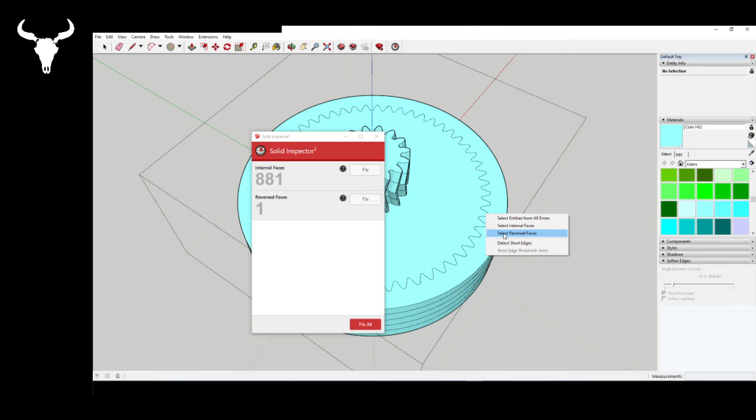Well, I'll still need to correct those here, so I'm going to select, fix the short edge. We don't care, I'm going to internal faces, right? Things like that.

Doesn't look like it worked. Why didn't it work? Fix. That is interesting, those here. I think you just need to delete one to let the program know it doesn't need it.

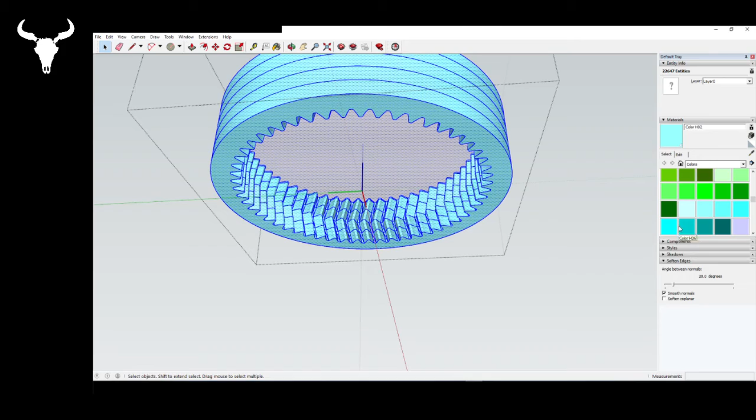Ah, there you go, short edge. Oh really? Oh yeah, it did work. Awesome, boom, it looked great. Oh yeah, I will be printing that ASAP.

I'll put that on printer tonight and see what it looked like tomorrow. Well, actually, I don't care, it's just to play, but I'll need to do my shaft in the middle of my gears in this one.

I need the shaft in the middle of this one. I'm not sure I need something in the middle of this one. I see some planetary gears that have like a triangle that goes from there in the shaft. Not sure if it is useful.

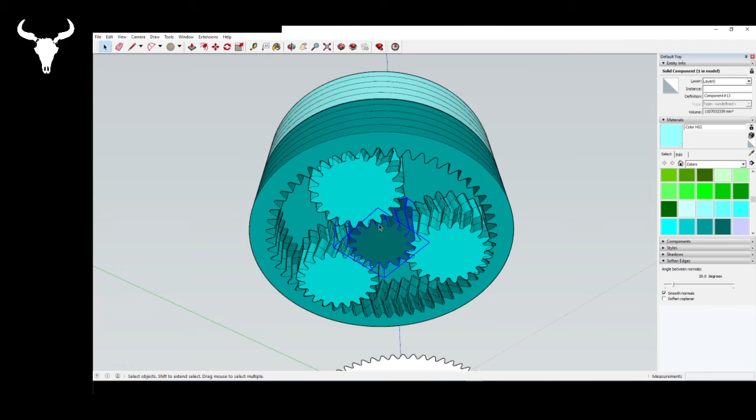If it's needed, I would just add it up in between those two layers to make one top, one bottom. But yeah, we'll see. So here was my video, just for fun, how to do that, was a good test, how to do planetary gear.

And they're all printable, like you check, let's take that one here. File, export, export, save as ratio again, we don't care. Fix that later. Remove, import ratio.

It is too big, I know that. 1% center. It's gonna be interesting to print for sure.

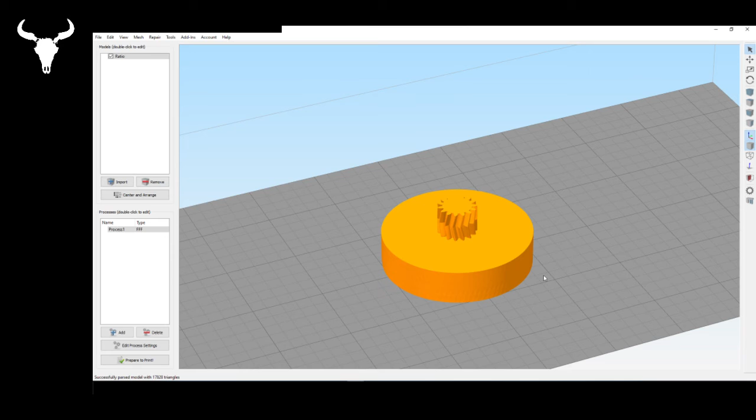But it's gonna sound stupid, but I want this one. I want the support here, not in there. You don't want to clean that up. Prepare to print, I'll have to add support for sure.

Yeah, it is perfectly printable. You can see here you have 2 layers in the gears, and at the bottom you have, well, this one's a bit small, but I know she worked because I've been with my setting. It worked, it has fillets.

This is the bare minimum, you want fillets. You see those second lines almost going in there. It worked, for by experience.

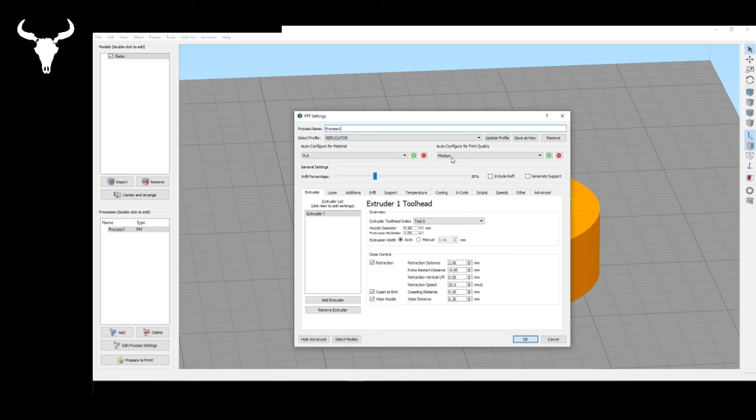I will add support though for sure, so support, generate support. Beautiful. Yeah, so I'll be printing that,